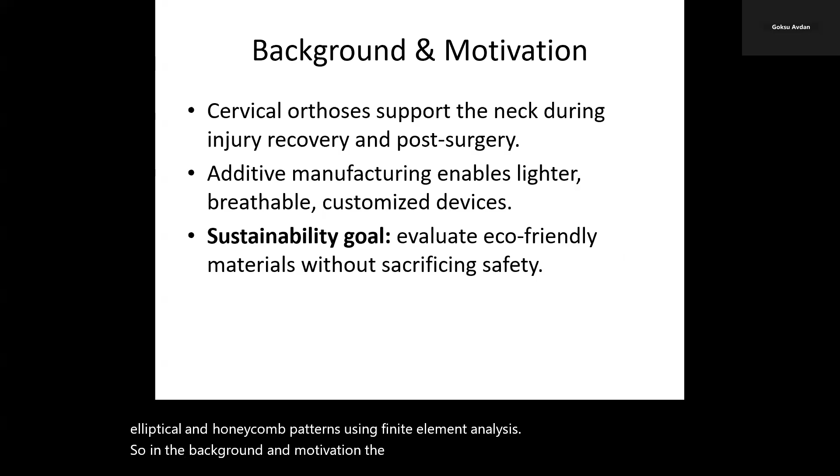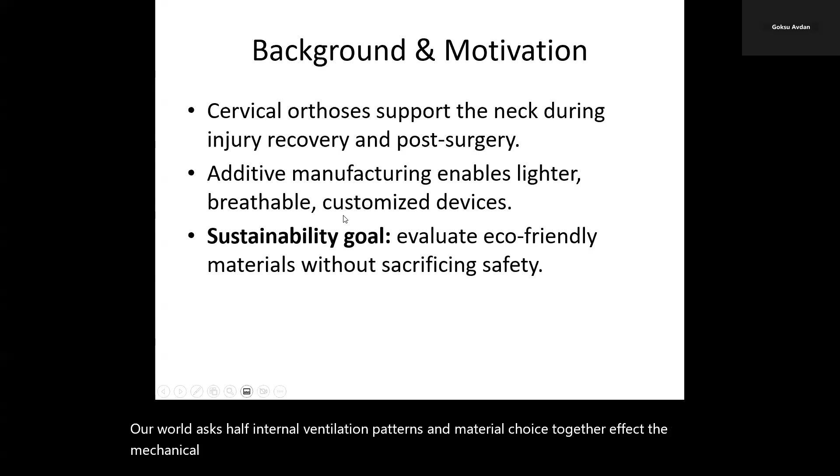In the background and motivation, cervical orthosis stabilize the neck after injury or surgery and support patients through rehabilitation. Because these are worn devices, comfort and breathability matter as much as strength. Additive manufacturing, which is 3D printing, lets us tailor shape and ventilation while reducing weight. At the same time, there is a push for sustainable materials that don't compromise safety. Our work asks how internal ventilation patterns and material choice together affect mechanical behavior in this sustainability goal, which we cover in today's presentation.

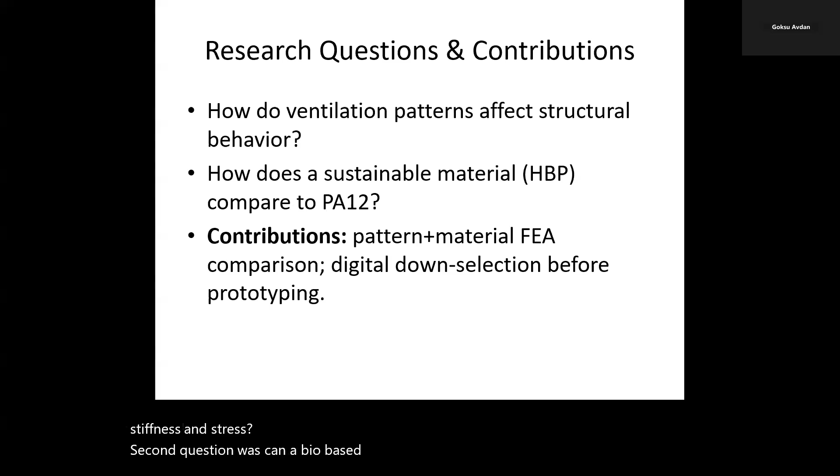We focus on two questions when we start this research. First, how do common ventilated patterns such as circular, elliptical, and honeycomb influence stiffness and stress? Second, can a bio-based material, hemp bioplastic, which was our choice for sustainable material based on the current literature review, perform the same or similar to conventional polyamide, PA12? Our contributions are a direct side-by-side comparison of patterns and materials using finite element analysis and a digital-first workflow that helps teams make early design decisions before printing prototypes.

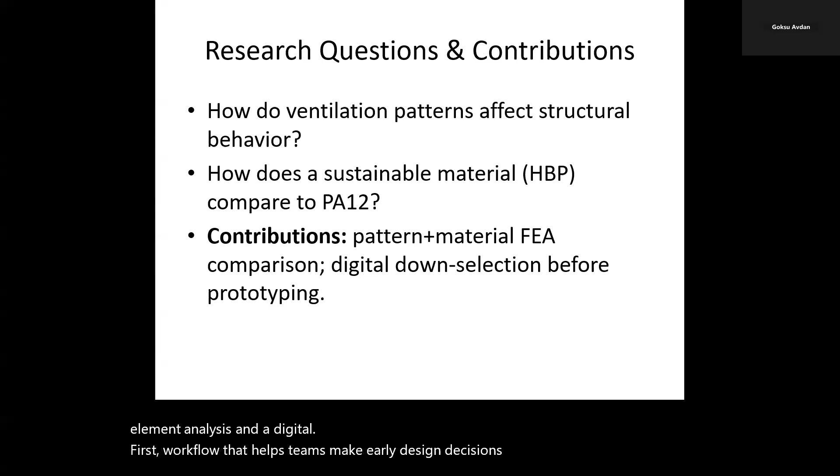We modeled the cervical orthosis in Autodesk Fusion 360 and fixed the wall thickness at 4 millimeters for fair comparison. The three internal patterns were selected for their practicality: circular for simplicity and uniformity, elliptical to improve airflow and reduce weight, and the most promising one, honeycomb, to combine ventilation with efficient load transfer. All designs target the same external fit while changing the internal architecture.

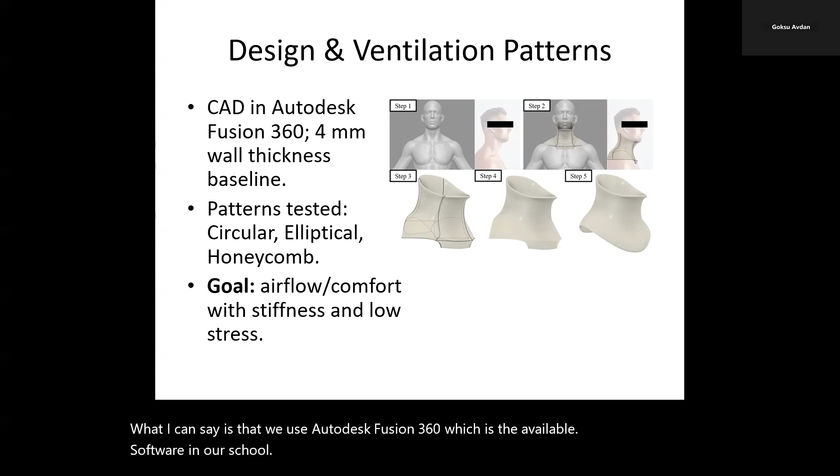We use Autodesk Fusion 360, which is the available software in our school. Other researchers can use different kinds of software to reach similar results in this analysis.

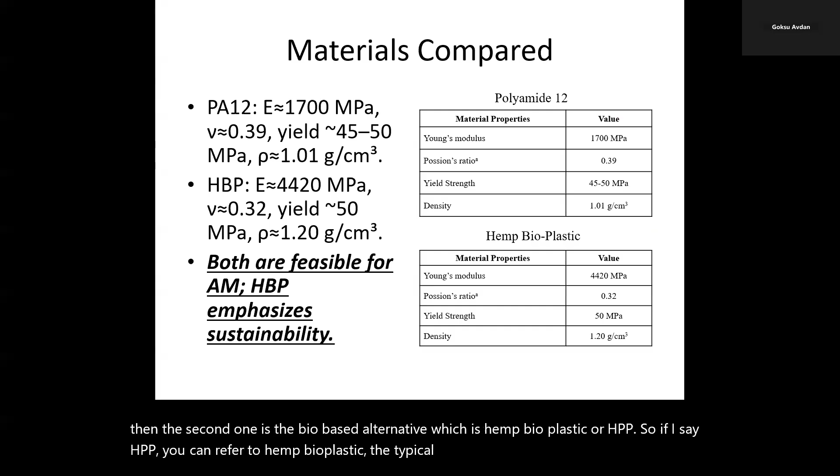In this slide, we compare the materials we used. The first was PA12, and the second is the bio-based alternative, hemp bioplastic, or HBP. The typical property values used in simulation were, for PA12: Young's modulus around 1700 megapascal, Poisson's ratio 0.39, density 1.01 grams per cubic centimeter, and yield strength around 45 to 50 megapascal.

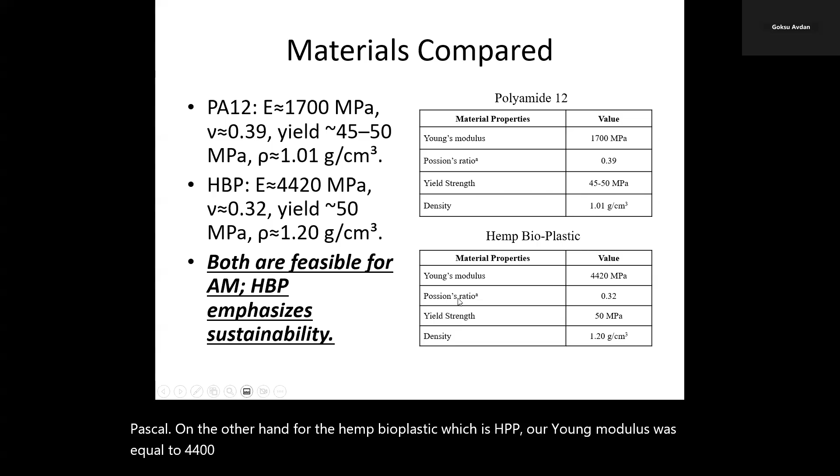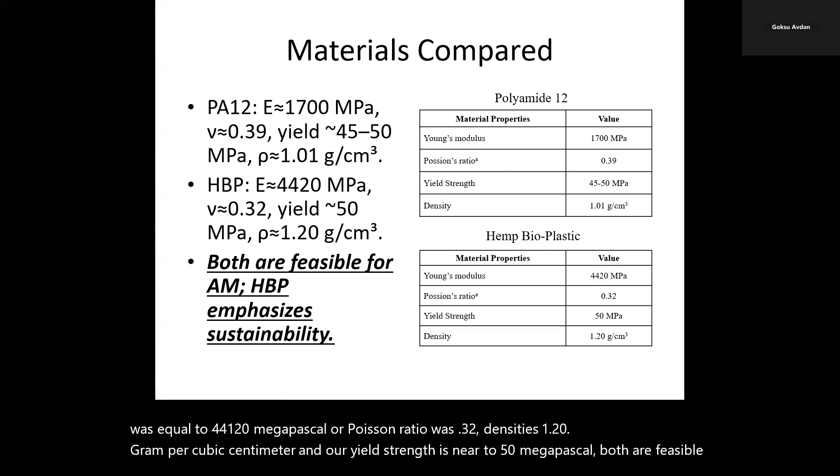For the hemp bioplastic, HBP, our Young's modulus was equal to 4420 megapascal, Poisson's ratio was 0.32, density is 1.20 grams per cubic centimeter, and yield strength is near 50 megapascal. Both are feasible for additive manufacturing, 3D printing, but HBP emphasized our sustainability goal in today's presentation.

Let's start with the finite element analysis setup after we finished our design. We used a solid tetrahedral mesh with a global element size near 5 millimeters and local refinement to 2 to 4 millimeters in curved or thin regions and expected high stress zones.

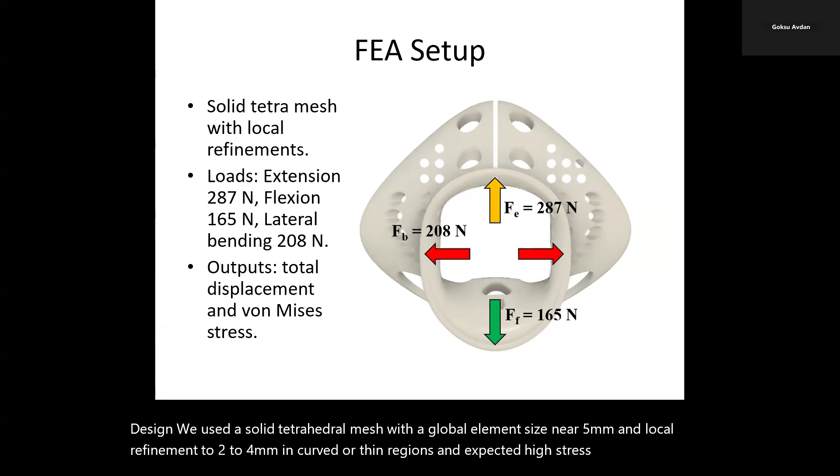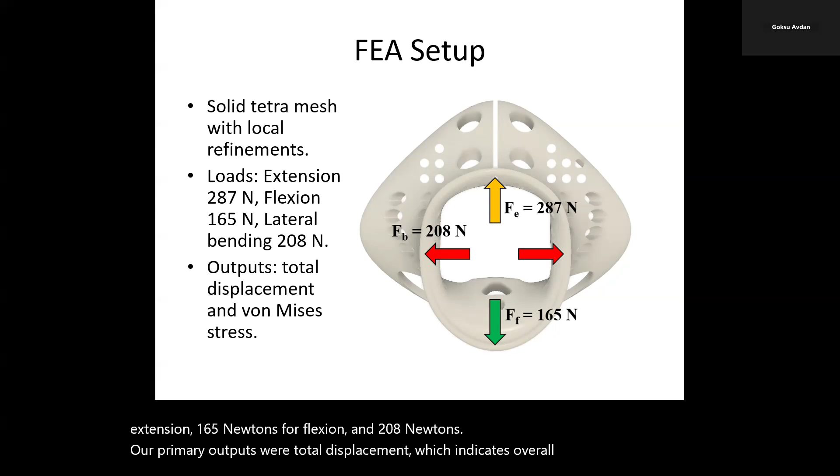Loads were applied at the upper inner surface to reflect key neck movements: 287 newtons for extension, 165 newtons for flexion, and 208 newtons for lateral bending. Our primary outputs were total displacement, which indicates overall stiffness, and von Mises stress, which we compare to material yield.

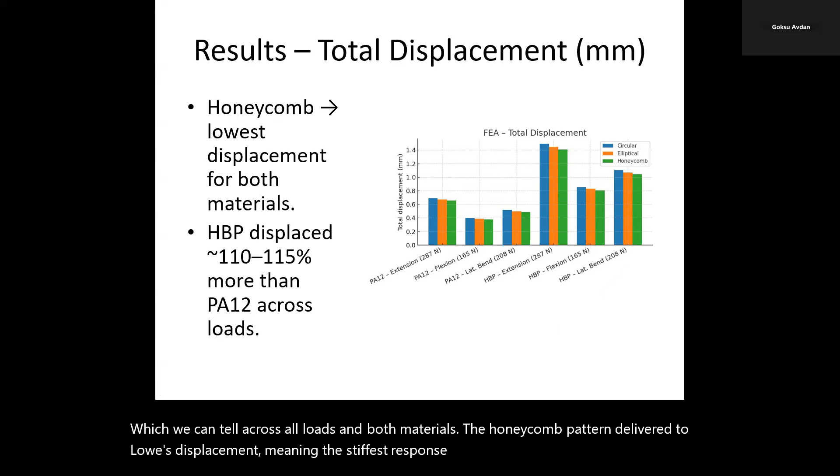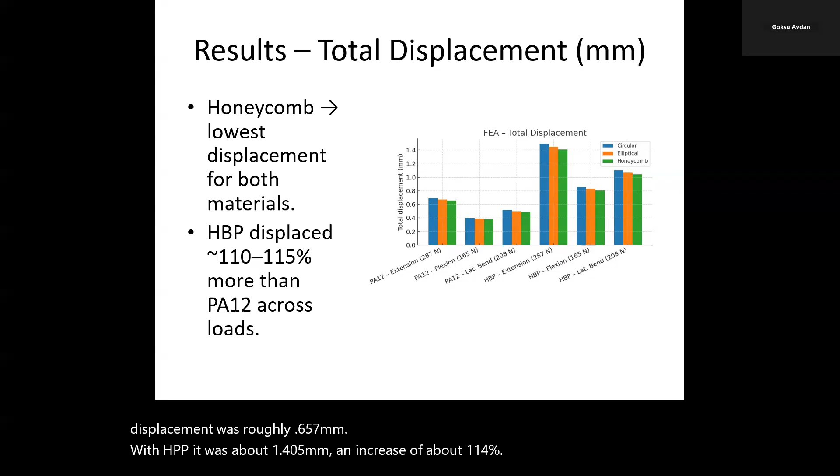In terms of results, using 3 different patterns and 2 different materials in our research, across all loads and both materials, the honeycomb pattern delivered the lowest displacement, meaning the stiffest response. With PA12 in honeycomb, extension displacement was roughly 0.657 millimeters. With HBP, it was about 1.405 millimeters, an increase of about 114%. Similar ratios held for flexion and lateral bending. This tells us geometry strongly controls global stiffness, and honeycomb is a consistently efficient choice compared to circular and other design options.

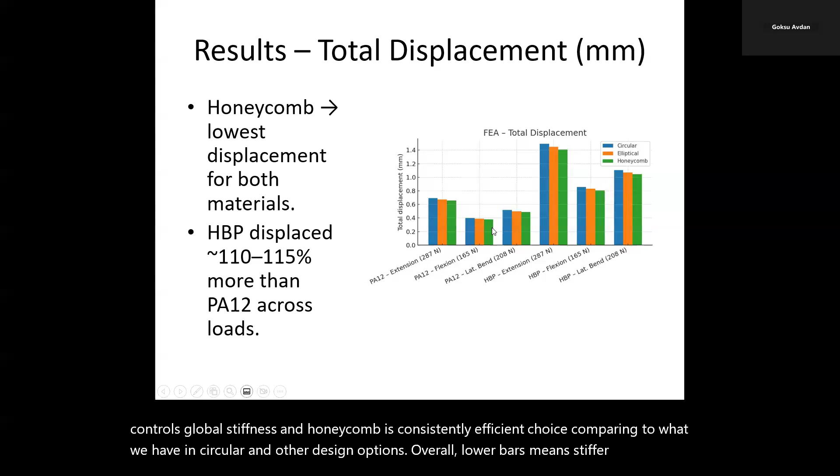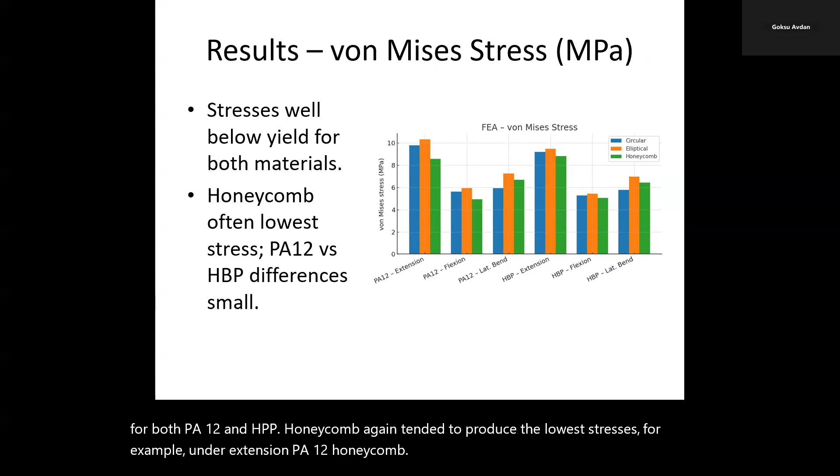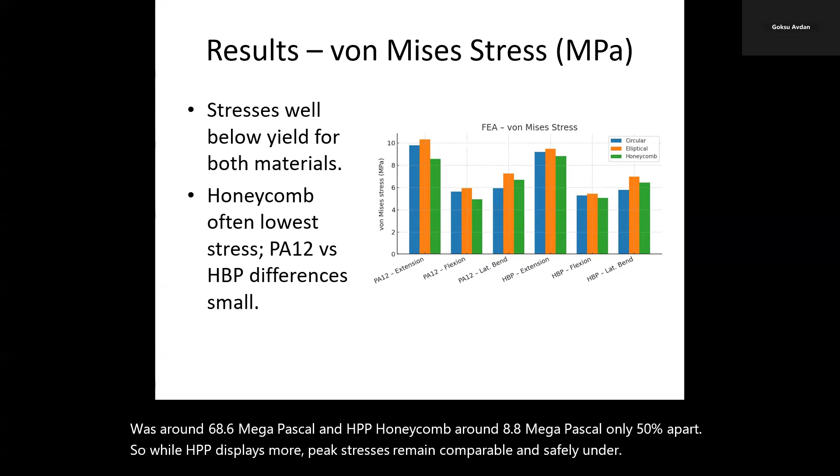Overall, lower bars mean stiffer response. Honeycomb is consistently the lowest one we have here. For stress, the differences between materials were very small. Values stayed well below yield for both PA12 and HBP. Honeycomb again tended to produce the lowest stresses. For example, under extension, PA12 honeycomb was around 8.6 megapascal, and HBP honeycomb around 8.8 megapascal, only a few percent apart. So while HBP displaced more, peak stresses remained comparable and safely under material limits. Overall, the stress remained well below yield for PA12 and HBP, with honeycomb typically lowest or near lowest in our design preferences.

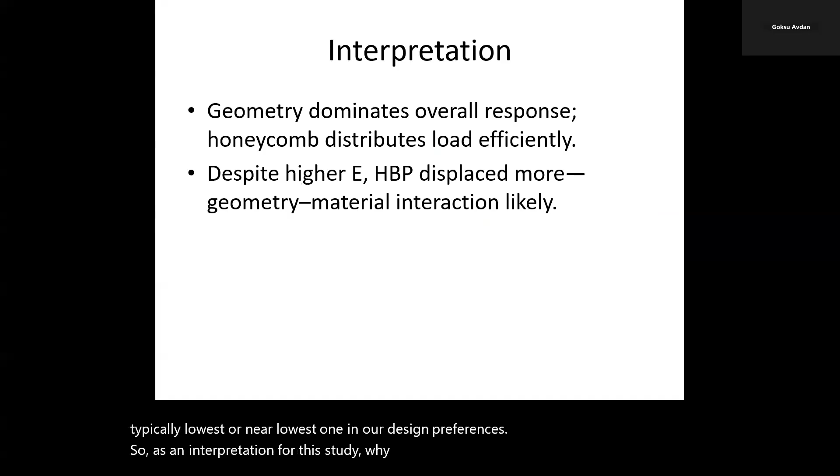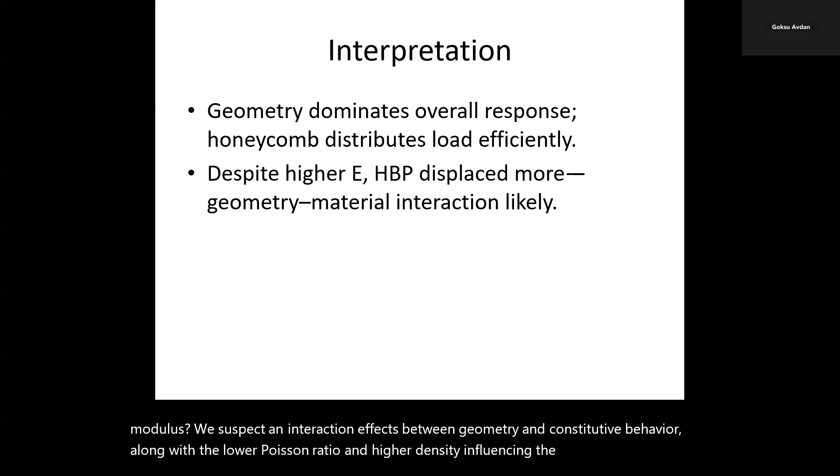As an interpretation for this study: why does HBP displace more despite a higher modulus? We suspect interaction effects between geometry and constitutive behavior, along with the lower Poisson's ratio and higher density influencing the response. The main point is that architectural patterning can outweigh nominal property differences. Honeycomb distributes loads efficiently, improving stiffness and keeping stress low.

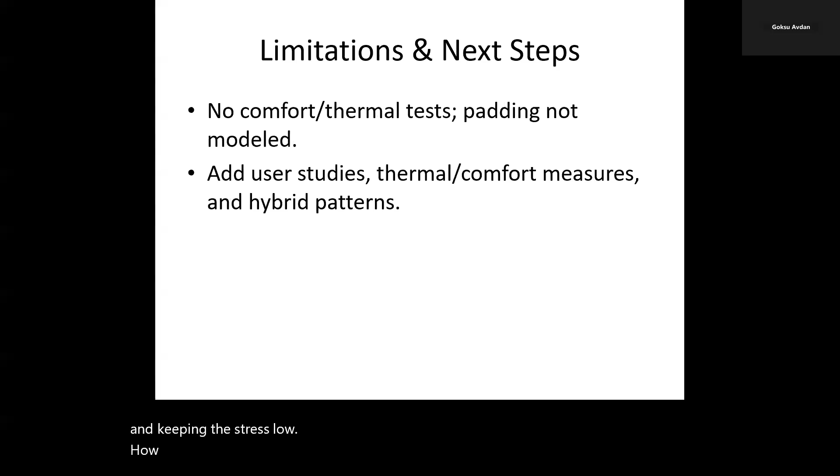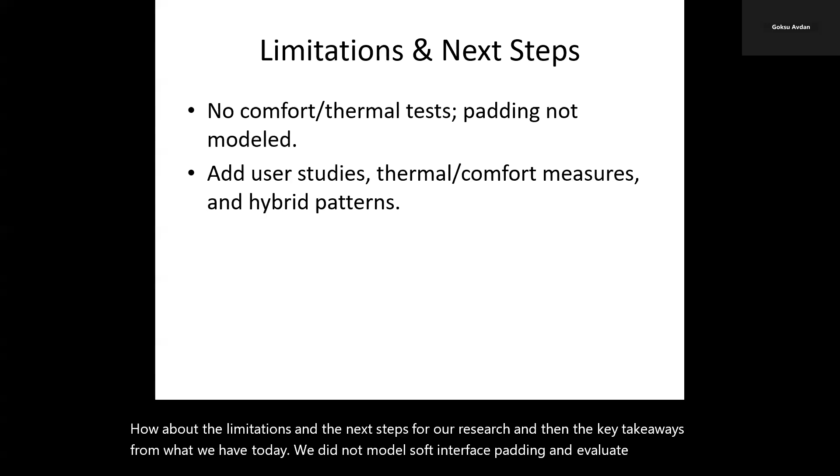How about limitations and next steps for our research, and the key takeaways from today? We did not model soft interface padding or evaluate comfort and thermal behavior for our users. Those are critical next steps for the prototypes. We also plan to incorporate AI-driven optimization for patient-specific designs and test hybrid patterns.

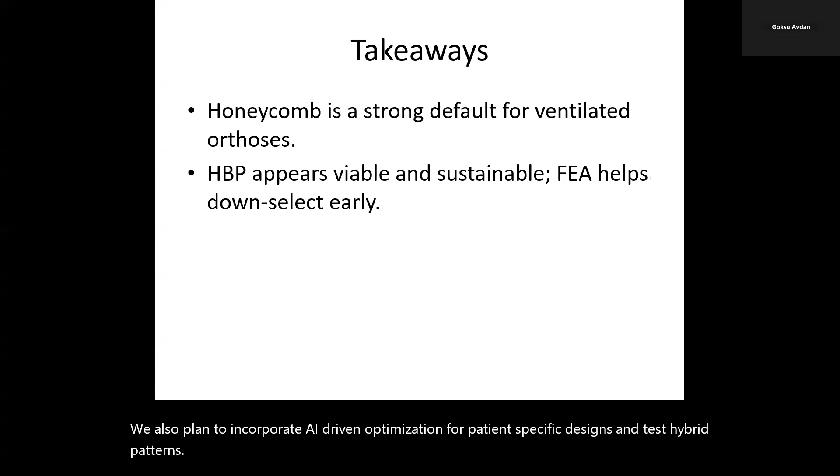Overall takeaways from today's presentation: honeycomb is a strong default for ventilated neck orthosis. HBP appears structurally safe and offers a sustainable path, and digital FEA, finite element analysis, is a cost-effective way to down-select designs before printing and trials.